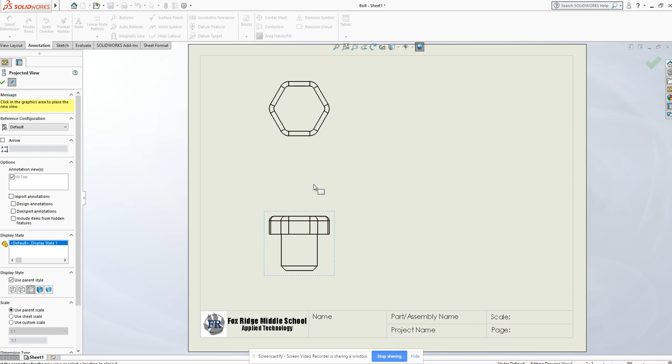To start our next drawing, go to New, pick Drawing. Again, we will receive the SOLIDWORKS template and be ready to place a part. When I click Browse, this time I'm going to choose the bolt. I again will place a front, a top, the right side, and the isometric on my drawing. After getting all 4 projected views, move the isometric into the upper corner.

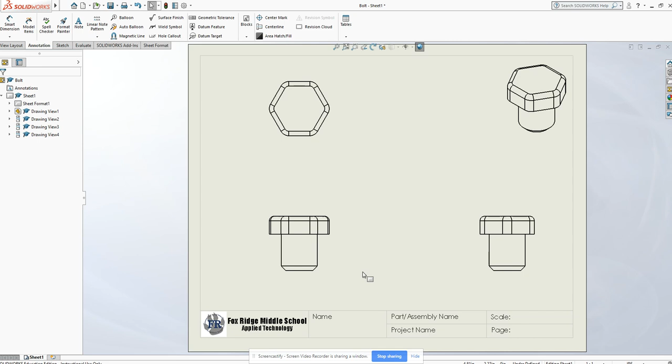Click on the front view, look at the current scale. Current scale is set at 1:1. You have quite a few dimensions to lay out for this part, and it's filling the space pretty nicely, so I'm going to leave these alone. Go to this one over here and make this one 1:2. Again, half the size of the flat views. It goes up in the corner, and I've finished with the isometric view.

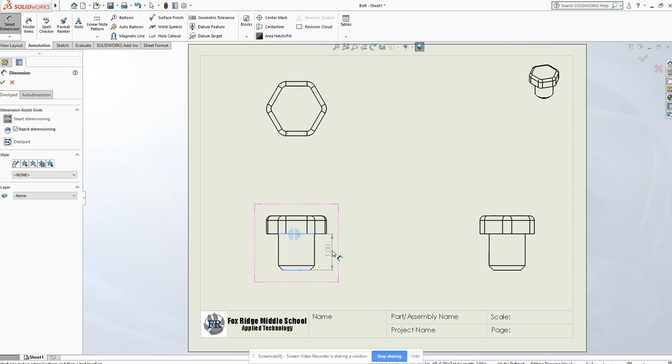At this point, I am ready to dimension these. You'll notice I did leave some space below because I am going to have to break some of our should rules and put some dimensions to the outside because, as you'll see, I can't put them to the inside. Starting with smart dimensioning, I'm going to look at the height of these individual pieces. One of the really important dimensions will be the height from the very bottom of the stem to the top of the stem. So I'm going to pick 2 lines in that location and show that as the 1 inch.

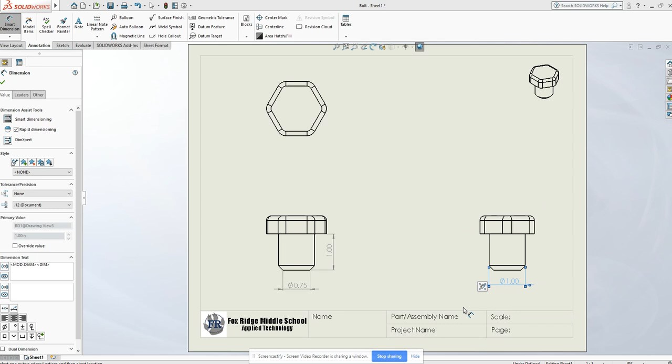I'm also going to pick the diameter of the small section of my chamfered edge. I'm going to look over here and say, to do my large diameter, I'm going to click those 2, placing that down below. That gives me the majority of what I need for the stem, except for my angle.

I'm going to zoom in to show this individually. I want the angle of this from horizontal. So what I need to do is click the line, and then click the horizontal line nearest to it. And as long as I pull off in this direction, I'll get the exact measurement I want. If we start to go this way, I'm going to get a different measurement, different over here. Okay. I want this one right here because if you remember our chamfer settings, this was that 45-degree cut.

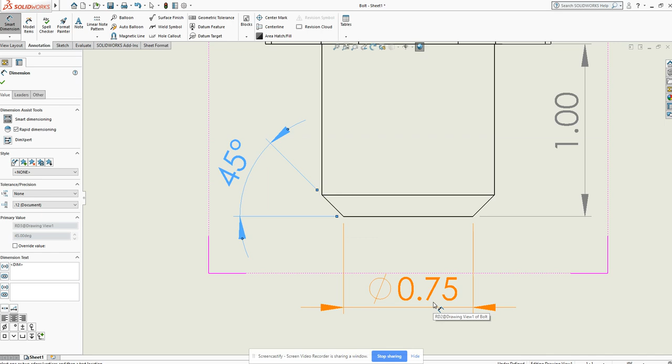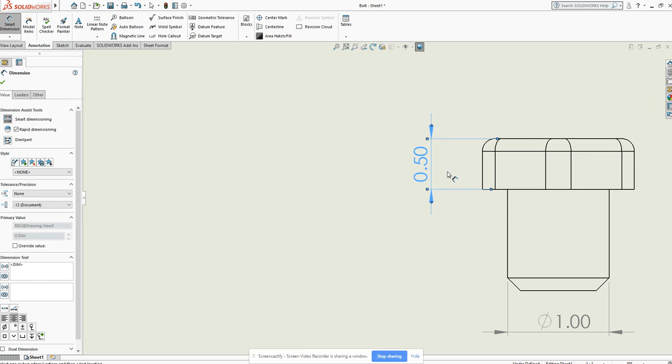And this is actually all the information I need for the chamfer. Knowing that this is a 45-degree cut, seeing what the result is, and what the original was, I can figure out exactly how big that is with some simple math. So that's perfect for that one. Then I'm going to come over to the right side view and use this to grab the top and bottom of my bolt. This is a much more correct dimension than picking this straight line here.

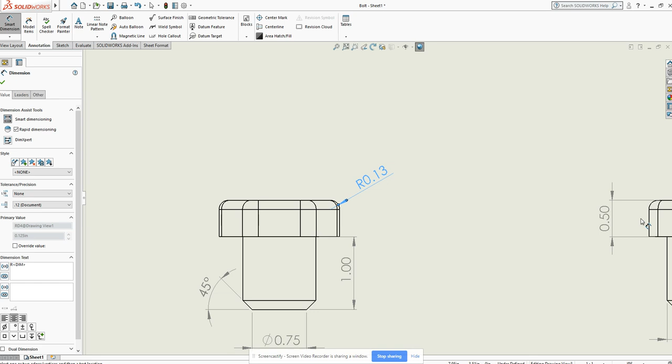Excuse me. I'm then going to use the other view, because I can keep it between the views, to dimension the radius here. Again, to show that this is a 90-degree rounded corner, we show the height of the object overall and then the radius of the corner. If we do this differently, it implies that it's not necessarily a 90-degree radius corner. This is the proper way to show that.

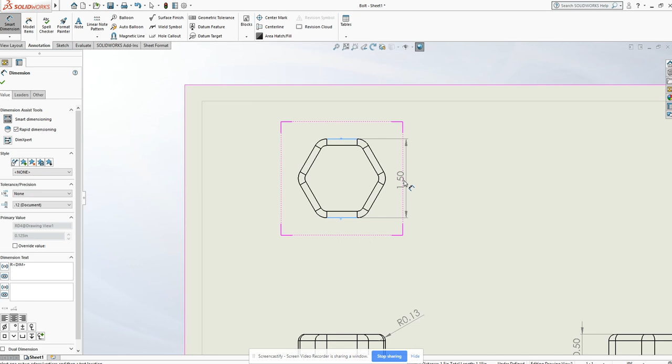I'm now going to turn my attention to the top view to fill in the information that is missing. The first thing I'm going to need is the overall side-to-side measurement. Bolts like this are sized by the wrench size used to turn them. That wrench size is the distance from the flat to the flat. So I'm going to go ahead and come all the way out to this line, come down all the way to this line, and pull this measurement out to the side. So if this was a bolt in real life, it would need a 1.5-inch wrench to turn the bolt.

I also need to dimension the radius of my arcs here. I'm going to use this one because I can't use any of these that would be really nice between the views, but this one's pretty close. So I'm going to use this one here. And again, by only dimensioning this one here, I am telling you that all of these corners on this same pattern are the same.

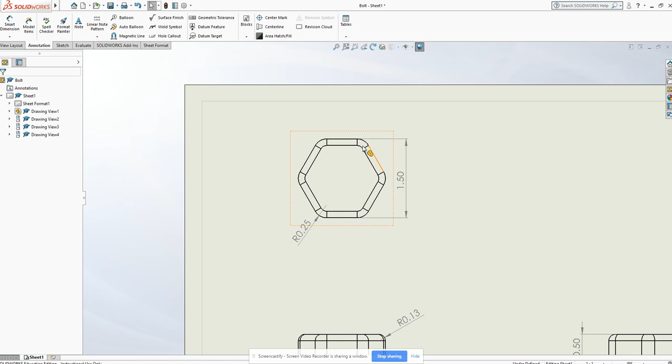Again, by only dimensioning the side-to-side measurement on this regular hexagon, I'm telling you that this is a regular hexagon with 60-degree angles and all that, just like normal. These are all the dimensions that are required.

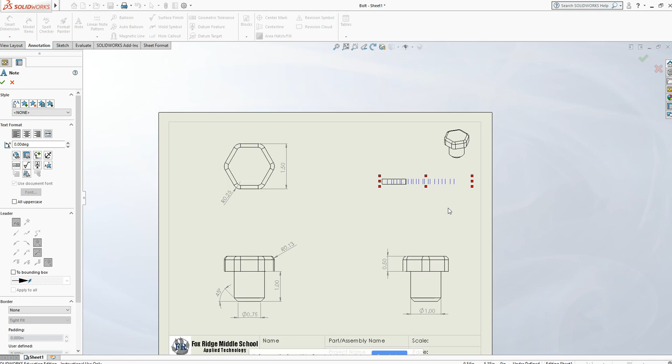The last thing I want to do before filling out the title block is go to Note, drag a box to make a box, tell you that the material equals plain carbon steel. Hit enter. Fill out the mass. I made an error and accidentally typed a plus sign here. Don't hold shift when you hit the equal sign, you'll get a plus sign instead.

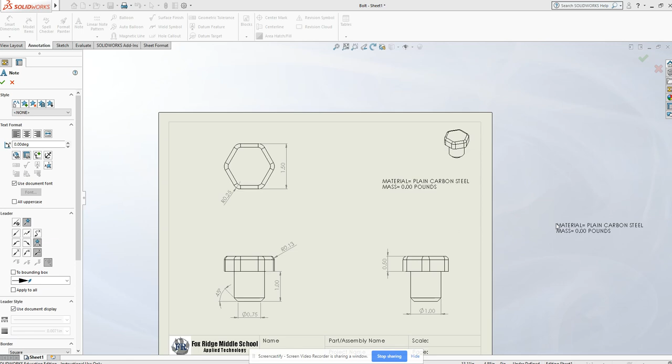Again, you're going to go to the actual part itself, go to the Evaluate tab, and you open up Mass Properties after setting the material. And at that point, you'll be able to see what the mass of this object is. As a placeholder, I'm just going to put 0.00 pounds. To complete this drawing, I will fill out the title block. You can see a copy of this fully completed in the example packet.